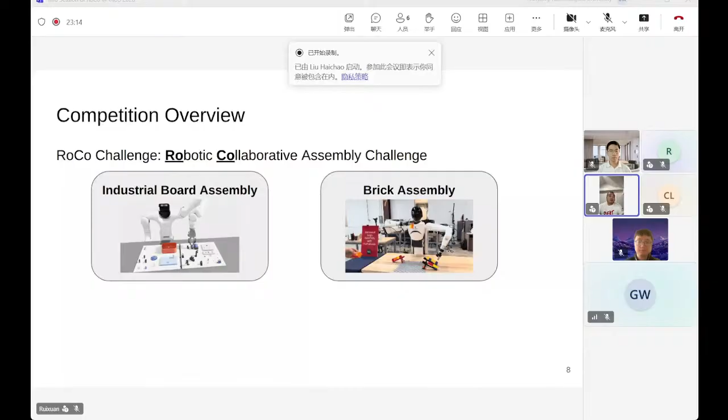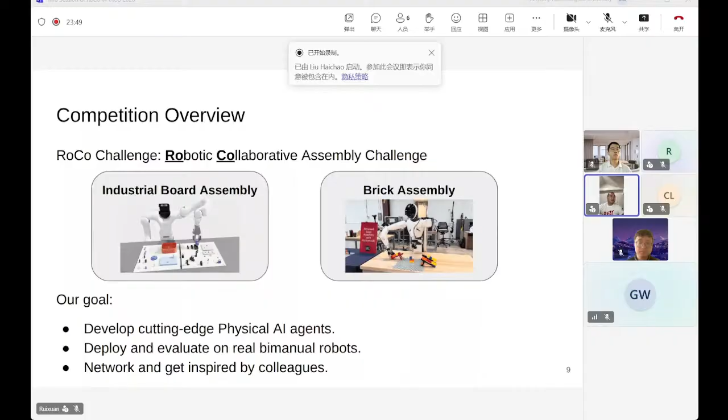And there are 3 goals for this competition. The first goal is that we want to use these 2 tracks to let the users develop cutting edge physical AI agents and see how we can push the boundaries of physical AI. The second goal is that we want to deploy and evaluate on real robots on these difficult tasks. And the third goal is that we want to bring the community together, build the connection between the researchers and get inspired from our colleagues.

And for this year's competition, we have put together a pretty amazing prize pool. The total prize pool for now is going to be over $20,000 in cash prizes. And we are very excited for all of you to compete for this prize pool. During the on-site event, we're going to invite all on-site teams to the award ceremony and the networking event. We want to provide this opportunity for all of the researchers to connect together and push the boundary of physical AI.

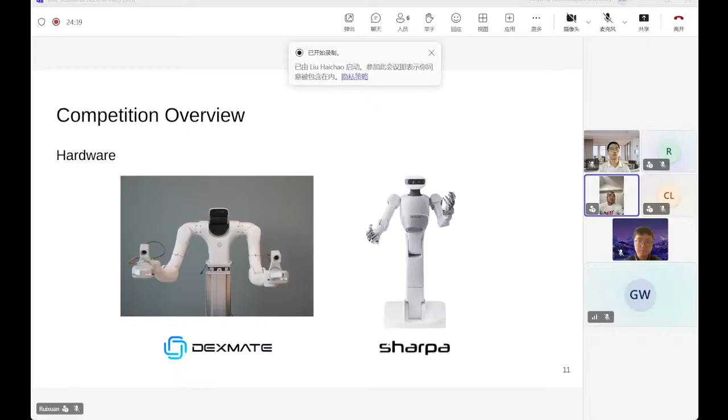And for this competition, we will have a dedicated point of contact for each track, which is the industrial board assembly and brick assembly. Each POC is going to get in touch with all of the participating teams and support them to develop the solutions. All the teams will work with their POCs and organizing sponsors during the virtual preparation phase before the conference. So please feel free to communicate your questions with your POCs and direct your questions to our emails.

So for this competition, our goal is to support teams to solve the challenge instead of really adding difficulty to the challenge. In short, teams can use any approach to solve the task, and we will evaluate the solution based on 2 criteria. The first is the performance of the solution. We want to see how capable the agents the teams build are, how many assemblies or how many tasks they can achieve. And the second criterion is the speed of the solution. Basically, how long does the agent take to accomplish these tracks?

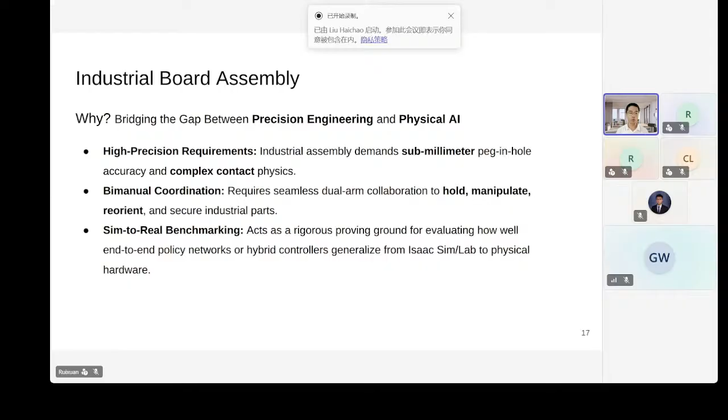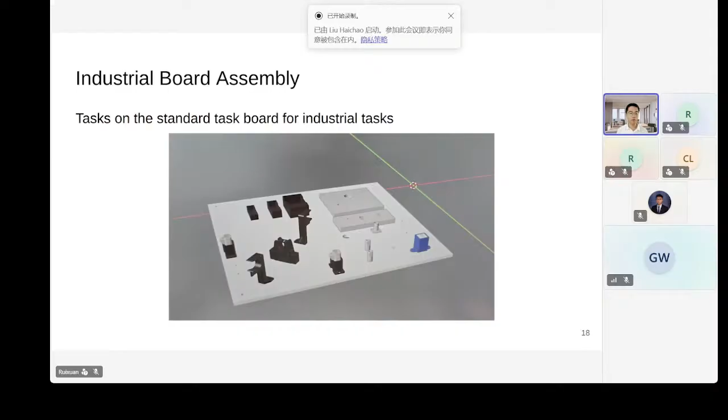The first one is screws. As you can see in the left-hand side of this pad, we have different kinds of screws to be screwed onto the small pad. And also we need to fasten multi-specification screws into the different threaded holes so they will not be removed easily when we have external force.

The second task is for connectors. It is also a very representative task in the industrial scenarios. We have many electrical interfaces such as RJ45, industrial pins, USB, including USB-A and USB-C, and also HDMI ports. So we need to pick them and then plug into the right ports. So it is also very challenging. We need to pick them and then we need to perceive the forces given to the robotic arm, and then we can judge whether the electrical interfaces are inserted to the right ports.

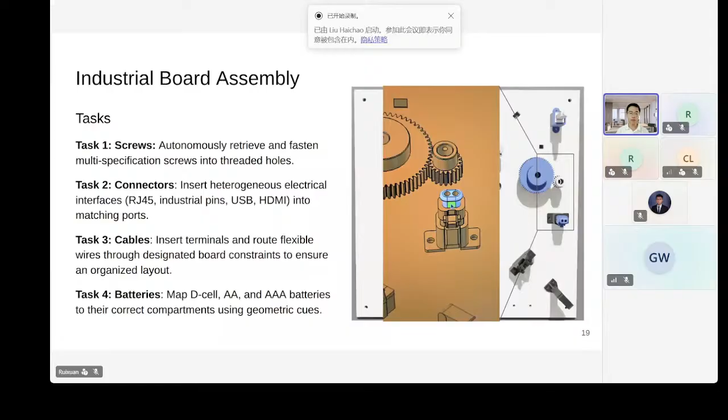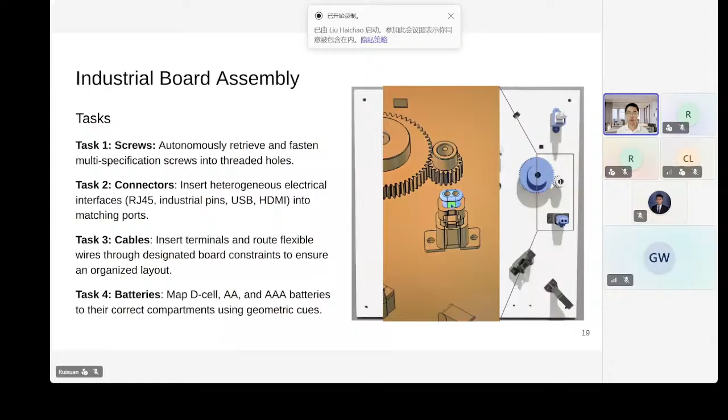Okay, as you can see here, we have a very accurate meshing process of the 2 gears. So we not only need to insert the gears, we also need to mesh them. So it is also a very challenging part in the simulation and also in the real world. So you need to keep an eye on this very detailed physical interaction. Next.

And in the first phase in the simulation track, with our collaboration with A*STAR and Dexmate and also the TARS customized gripper support, we have collected tons of simulation data for the participants to train their own models. And we also encourage the participants to use some model-based, optimization-based, and control-based methods, or use the foundation models to do this kind of very long horizon task. Okay, next.

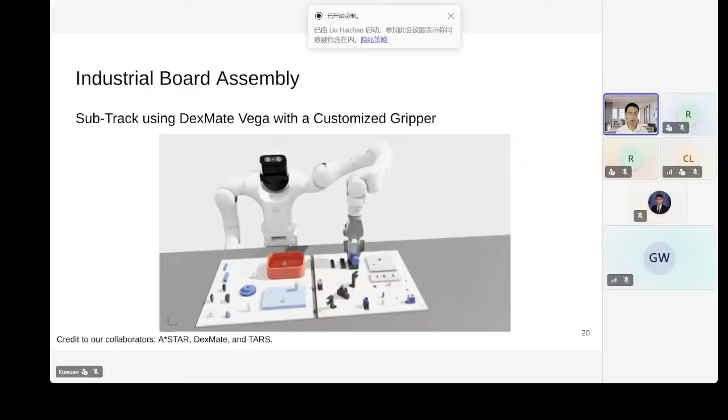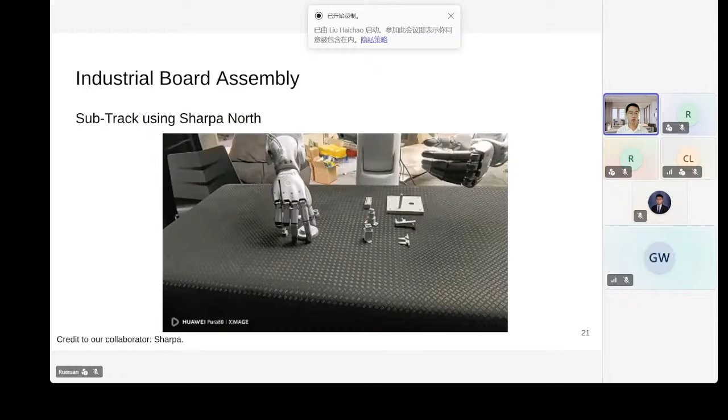And for the next sub-track of industrial board assembly, we have invited Sharpa to provide many Sharpa wave hands and also their Sharpa North robotic embodiment to do the second sub-track of the same tasks to do the industrial board assembly. As you can see here, we have the very vivid video to make the robotic hands grasp all of the parts, very small parts, and do the handover of the parts before inserting them to the right pose.

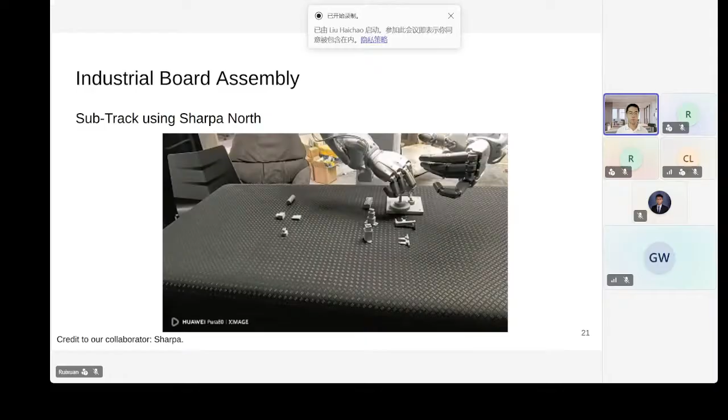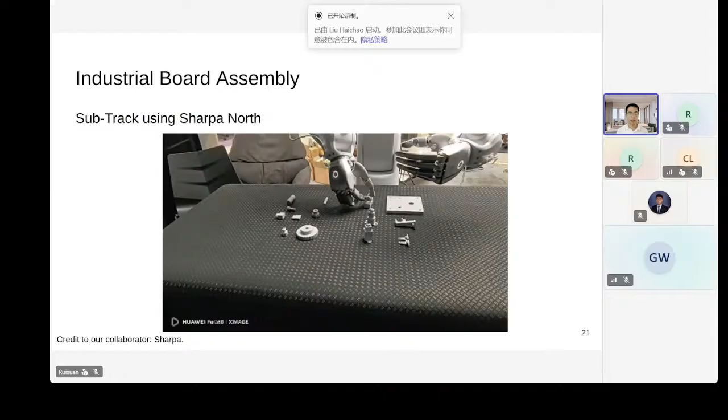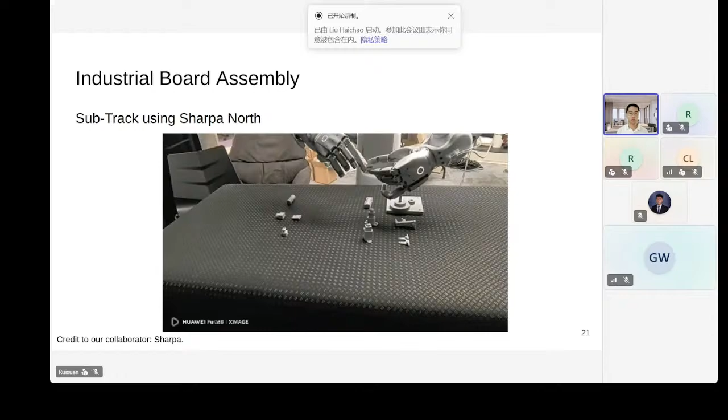So after our first phase, we will also collect more than 200 samples of the long horizon tasks, and then we will provide a very mature model as our base model to train the very high-DoF robotic embodiments via training, and also for the training of the module-based parts. And here we thank Sharpa to provide the hardware, software, and also the teleoperation solutions. Okay, next.

Okay, for the score of the industrial board assembly, in the simulation track and also in the real world track, we have the primary metric as the total completion score. If the total completion scores of several teams are the same, we will use the task completion time as the secondary tiebreaker. Okay, for the final score, it is the mean of the normalized scores across, as I mentioned, the 4 functional procedures. So each procedure contributes 25% of the total score, regardless of the number of components involved.

So you need to make your own strategy to figure out which one is easy, which one is challenging, and you need to organize your own time on each task board area. And then I need to mention that we highly recommend to complete the simulation phase and submit your own simulation results to our committee to give a very fair performance evaluation. But we also accept proposals to provide innovative solutions, and you can just complete your proposals in the real world track in IROS 2026. Okay, next.

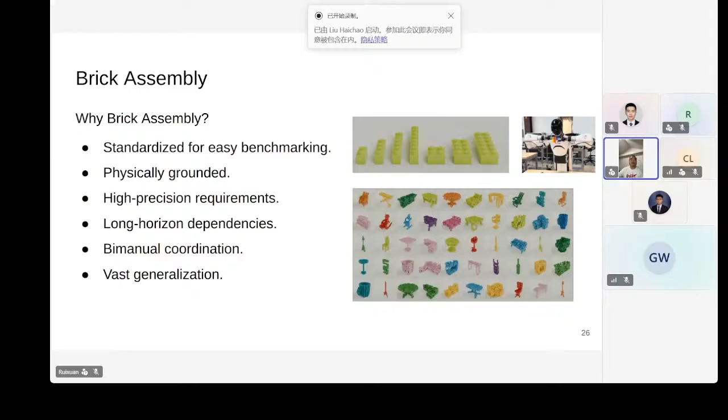Before we dive into the details of this task, I want to briefly talk about how we actually represent the brick assembly structures. In our task, we represent a brick assembly using a JSON dictionary, and each node in the JSON dictionary represents a brick.

A brick is represented in this form. The brick ID denotes the brick type, representing either a 1x2 brick, a 1x4 brick, or a different dimension of brick. The XYZ represents the brick position in the structure, and the orientation represents the brick orientation. We also have an additional color field to represent the color of this specific brick. That's the brick assembly representation.

This year, the brick assembly track is going to have two subtasks. The first is called step assembly, and the second is called sequence assembly. For the first task, step assembly, this task tests the agent's ability to follow a command. The agent only needs to perform a single step assembly, for example, just placing one brick at a desired location.

For this task, the input includes four different inputs. The first is the initial assembly structure, so we'll tell you what the initial structure looks like, and we'll also give you several renderings of the initial structure. We're also going to provide the goal assembly structure, the structure you want to build, along with renderings of this goal assembly structure.

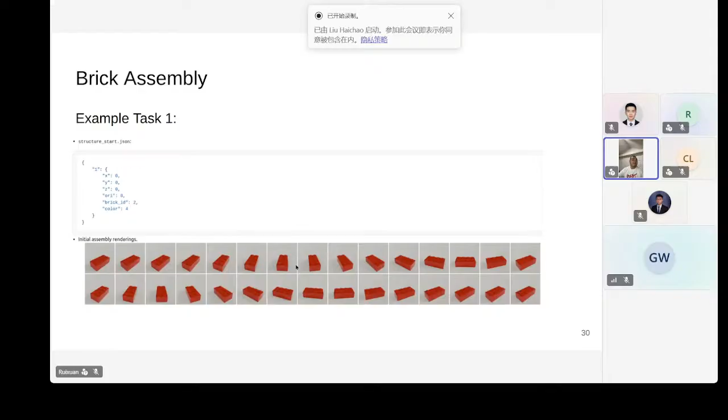Here's an example of what the input of this task looks like. You get an initial assembly structure represented in the JSON file format, and a bunch of renderings of how this initial assembly looks. You also get the goal assembly structure for the task, along with renderings of the goal assembly structure you want to achieve. In this example task, you just want to place an additional blue brick onto the red brick, so it's a very simple task.

Here's an example execution. If you want to get a score for this specific task, you just need to grab the blue brick and place it onto the red brick. That's the step assembly task.

The second task is called sequence assembly. This type of task extends based on the first task, requiring the robot to actually assemble a goal structure from scratch. In this task, we only provide the goal assembly structure, assuming nothing is built before this, along with renderings of this goal assembly structure.

The evaluation metric score is calculated as the number of correctly assembled bricks. After you assemble the structure, we count how many bricks you successfully assembled and use that as the score of this task. Here's another example: for the goal structure, you get a JSON file which includes all the bricks in the structure. In this case, we have 2 bricks, and we also provide a rendering of this structure from multiple views.

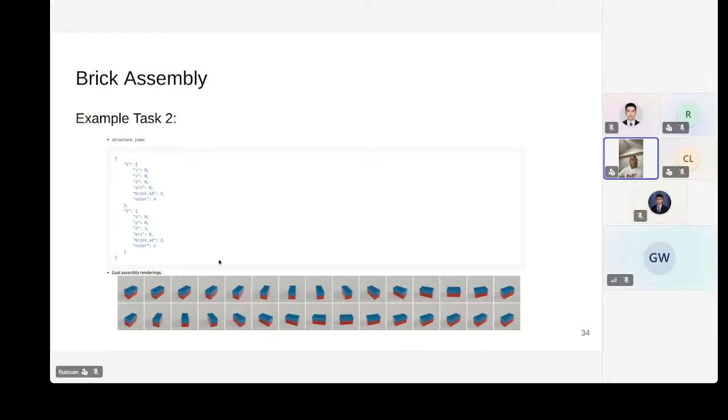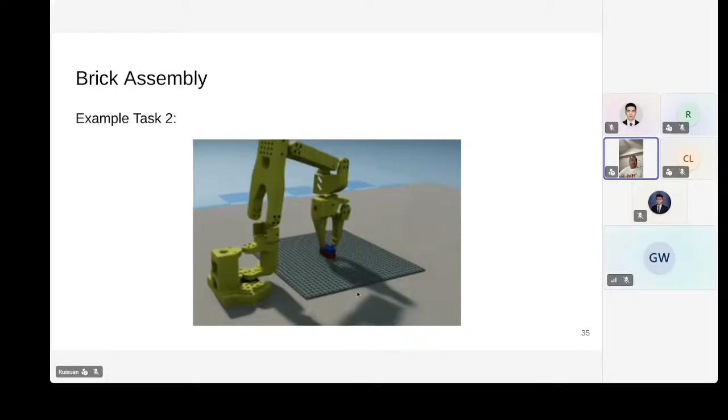Based on this input, this is another video showing an example execution. For this example task, what you need to do is use the red brick and the blue brick to build the structure specified in the JSON file. You just need to put the red brick onto the plate and then stack the blue brick onto the red brick to achieve the target assembly.

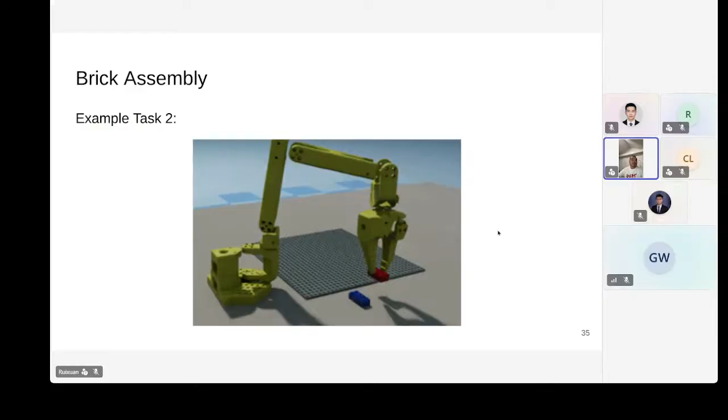So more details on the scoring metric. For the type 1 task, the step assembly, you get 1 point for completing one task. And for the type 2 task, the sequence assembly, we count the number of correctly assembled bricks for each task.

So with some number of type 1 tasks and some number of type 2 tasks, the total score is calculated as the sum of all the type 1 tasks you get, plus the square of all the type 2 tasks you get.

Here's an example to give you a better understanding of how the score is calculated. If we do the type 1 task as shown in this video and the type 2 task as shown in this video, these two videos show successful executions. Because you accomplished one type 1 task, and in the type 2 task you accomplished two bricks, you're going to get 1 plus 2 squared, which is 5 points for these two executions.

Here's another example, for instance if you fail some steps of the task. If you fail the type 1 task, you get 0 for that specific task. For the type 2 task, if you successfully place the first brick but fail the second brick, you get 1 point for this task. When you do the square and calculate the total final score, you get 1 point for this whole execution.

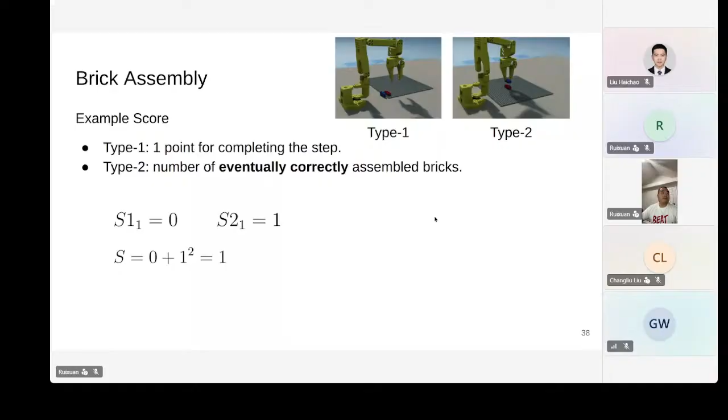So that's basically the details of the brick assembly tasks. During the offline preparation phase, we're going to help participating teams develop their solutions in simulation first. For the simulation, we'll use BrickSim as our environment, and BrickSim is built upon IsaacSim, so it inherits the whole ecosystem of IsaacSim. We'll release the link to BrickSim after this info session.

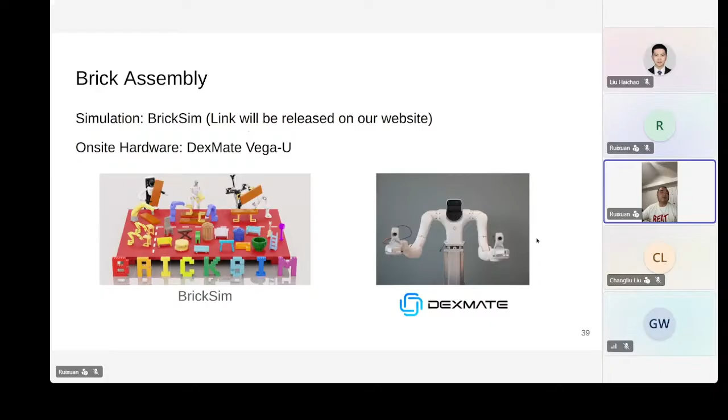For the virtual phase submission, for this track we require participating teams to submit a solution proposal. In this proposal, you can describe in as much detail as possible how you want to solve this task—for example, what approach you'll use and how you plan to do sim-to-real transfer. You can also brainstorm your unique ideas on how you might achieve this task better than other teams.

Since we're releasing the BrickSim environment, you can also build your own solution in it. This is not required—we don't require simulation results—but we highly recommend you submit your preliminary results with your proposal, as this would greatly increase your chance of being selected as a finalist team.